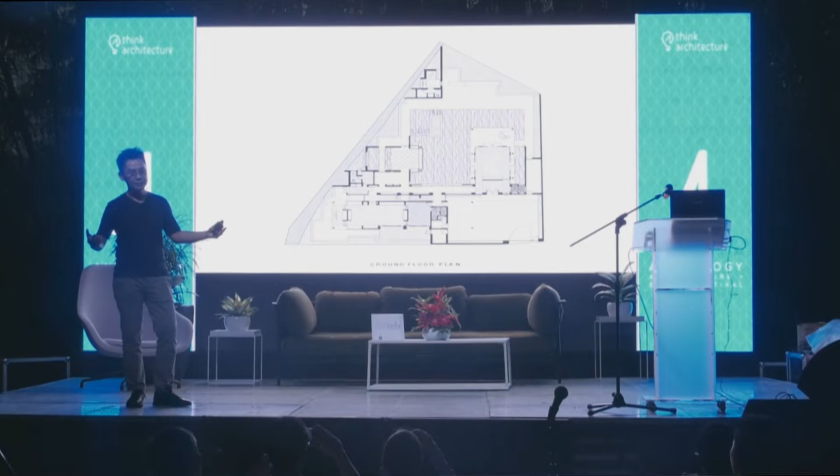Here you can see very truncated pavilions. These pavilions are butting walls, and they are framed into a square reflection pool that creates the central space and the ambience and feeling of the house. When you come home, you're greeted with this wonderful pool of water, which helps you calm down and feel like you're back home, back into a resort. That was what the client wanted.

From one house, we made such an impact with the owner that the owner's brother came to us and asked us to do yet another house for them. Here, the family was quite different—they valued their privacy, but at the same time also wanted to enjoy the valuable garden space in Singapore, which is very expensive if you live in landed property.

So they wanted to be able to open up, and we devised a somewhat upside-down house where the top can be turned into something very opaque and very solid. What you see here are some louvers, where when closed, it becomes a very solid box. This is actually the master bedroom and master living area, where they can have privacy and at the same time open up to enjoy the breezes and the views out.

This was where we devised a new, reinterpreted monsoon window, where we could close up the solidness of it as a wall and as a closure, but through a horizontal window, we were able to allow the breezes to come in. So you enjoy the rain and the breezes at the same time. I think this was something we later used in tropical high-rise situations.

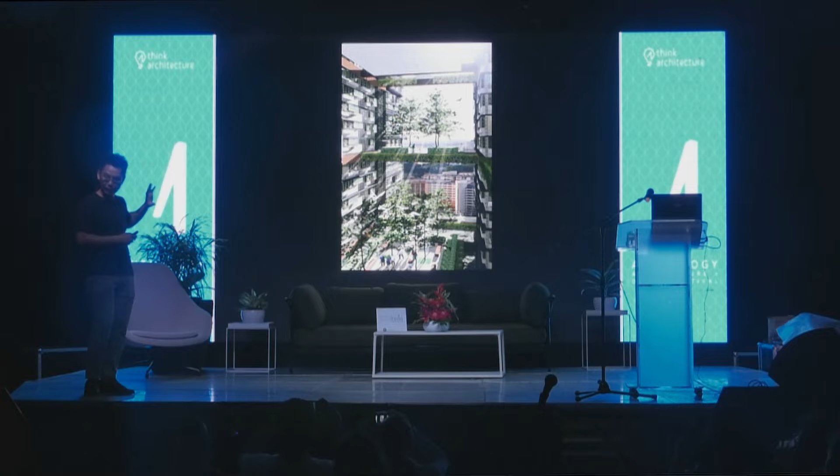So the idea was very simple: use the towers as a structure to support horizontal elements that allow us to choreograph the horizontal movement with this mega structure. At the same time, with these horizontal circulation spaces, we were able to domesticate this mega structure, so at any time you don't feel it's actually 50 stories, you feel it's only 5 to 10 stories. This was the rendering we created, showing how it was divided into 5 stories and then also 10 stories.

So it brings it down to a scale where people are more comfortable, rather than perceiving the mega structure as a 50-story, 2,000-unit building. At any one time, you feel it is actually a much smaller building. That was the main principle we applied to Skyville at Dawson. So we didn't win the competition, but very quickly we were given a commission in Bangkok, and we were able to realize some of these ideas.

So you'll see this rendering, this drone video, which actually shows you the quality of the spaces, and some of them were part of the competition. Instead of a very solid central core and sealed space, which a lot of the buildings were in Bangkok, we actually tore it apart and created 6 towers, a very porous structure, and also at the same time created vertical breezeways within them.

I call them vertical breezeways primarily because of the way the structure and spaces inside work. Because it has an internal space all the way up to 66 stories, there is a temperature difference between the top and the bottom, and that can actually create very good cross ventilation across all the apartments. That's actually 1.5 to 2 meters air movement speed across this vertical circulation.

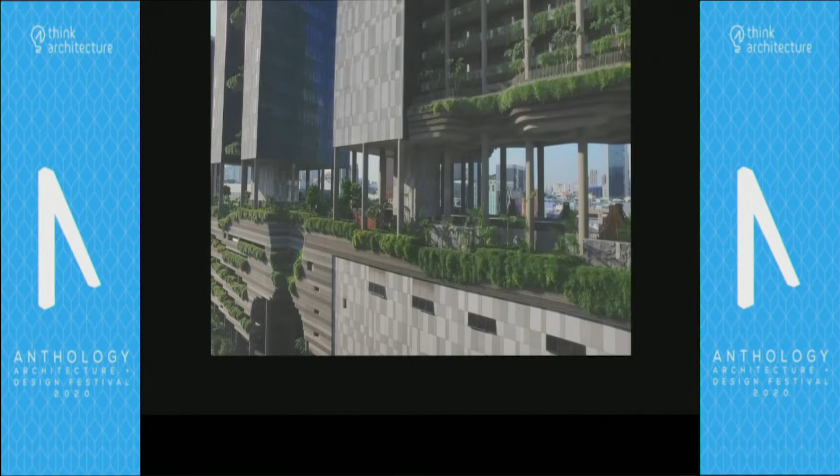So you can see the fifth floor is very porous, and it allows actually, it doesn't block ventilation in the city. This is a very friendly building in the sense that it allows air movement in urban context, in a city context.

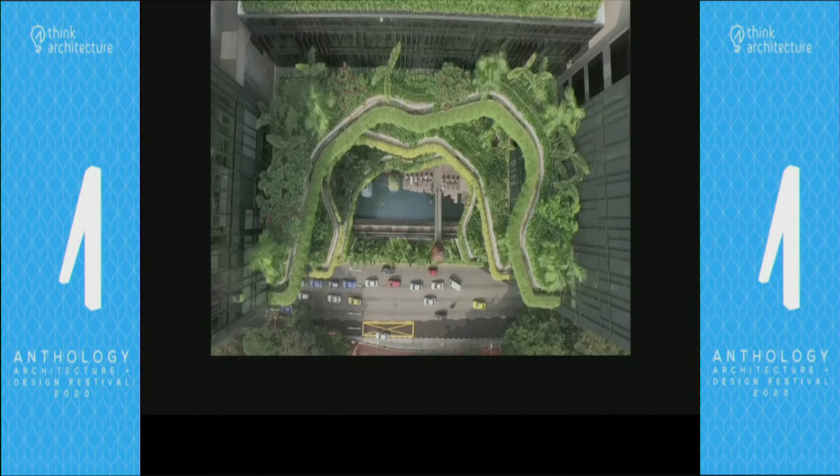Not responding to this. Okay, it's not responding to this. Maybe that's the cause of it.

The other project that I wanted to show you was the public housing project that I mentioned, that after 16 years later, the rules were changed. We were able to actually realize this project. And we were invited by the ministry to envision public housing into the 21st century.

Here I think what you do need to recognize is that we created a lot of community spaces, and you can see we have created 140% of the site area as community spaces. These community spaces are actually very impactful, primarily because they are open to everyone. It is not gated. Anyone, even a tourist, can actually walk in the building and enjoy all the horizontal sky gardens in this place.

So there are altogether almost 1,000 homes in here. It's a bit of a mega structure. But what we have done, which I'll show you in a couple of simple diagrams, is how we actually break down the scale of it, not just to domesticate the mega structure, but also to conjure up the notion of sky villages.

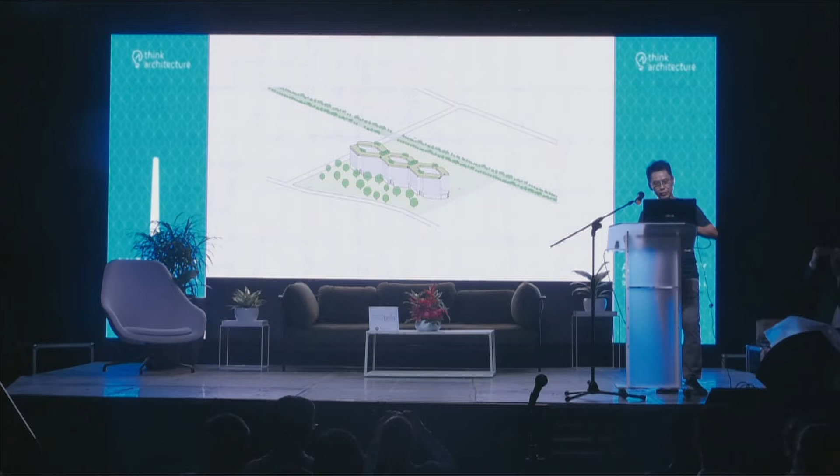And on top of each Sky Village of 10 stories, we actually dedicate an area that is for common use, which we call the Sky Village Green. And on each 10-story stratum, we have 3 Sky Villages, and we actually replicated this 2 times, 3 times, and 4 times. We could go as much as we want, really.

So the density is not an issue if we can actually domesticate the mega structure and still make people feel like they are in a much smaller building. So that is the principle of it. But of course, the structure must be able to support this number of villages in it.

So this is what the inhabitants have got to say about this project.

This residential complex is quite big scale, like a concrete jungle. But at the same time, it's quite small scale in the sense that the units are housed within certain villages, connected by intermediate sky gardens. It makes us want to not just stay within our homes, but really spend time outside to interact and bond with one another.

I think with all this being presented together, it increases the chance for interaction and engaging the neighbors and people around you. That's something that's lacking in many parts of Singapore, where you're just purely living in an urban jungle.

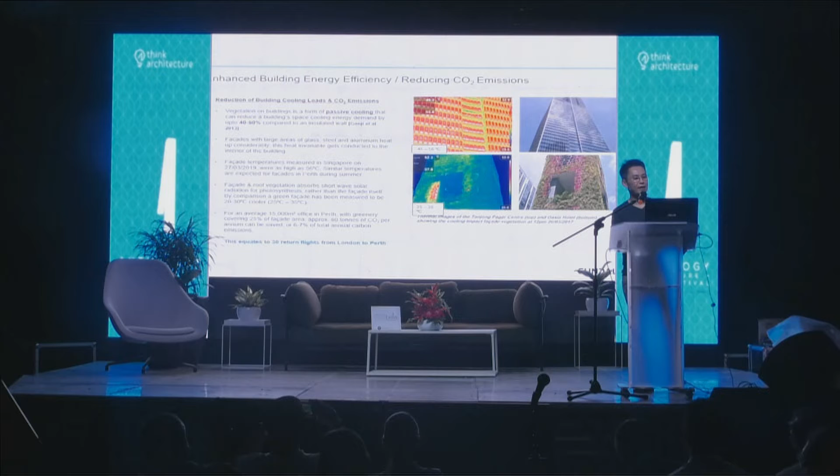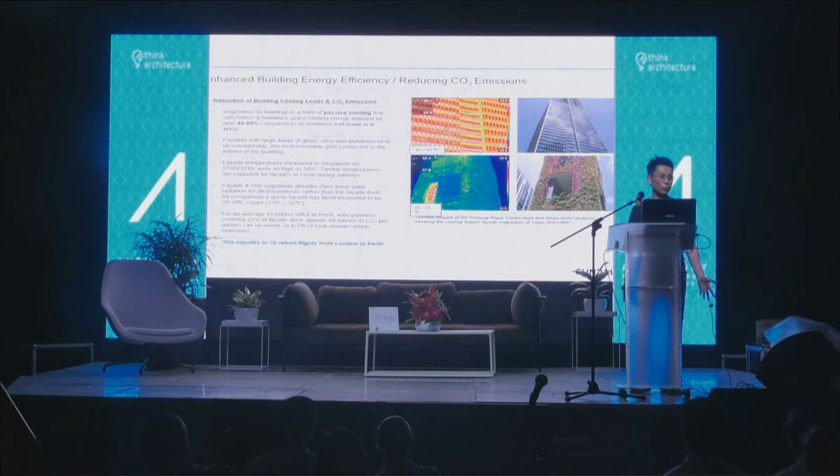Not only that, you can see this thermal imaging of the building compared to a glass and steel curtain wall building. It's almost 25 to 30 degrees lower in surface temperature. This goes a long way in combating the urban heat island effect and improving thermal comfort in the city.

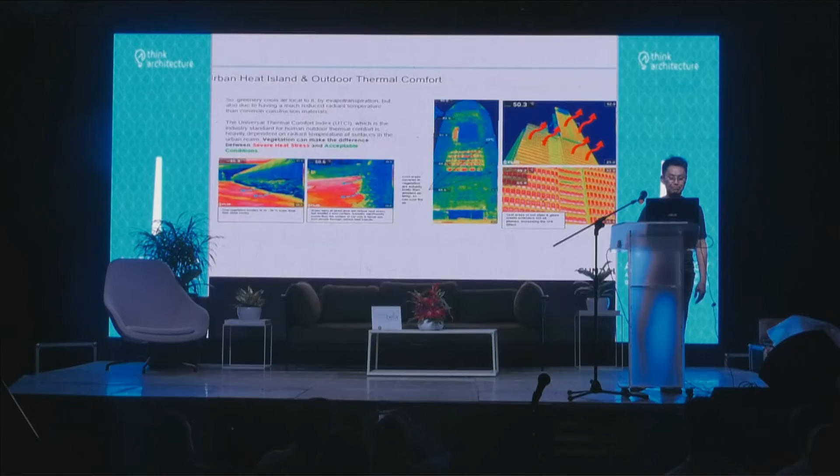So I'll just skip to the next one, which is Kampung Admiralty. This one for us was meaningful primarily because it was a mixed-use development, a social mixed-use development comprising elderly homes. What was really important is that it's located next to the train station, and most societies don't quite want elderly homes right in their backyard. At the time this project was conceived, that was the kind of public sentiment going around, and we wanted to demonstrate that you could have elderly homes in a development and yet have it be an important contribution to the neighborhood and the precinct.

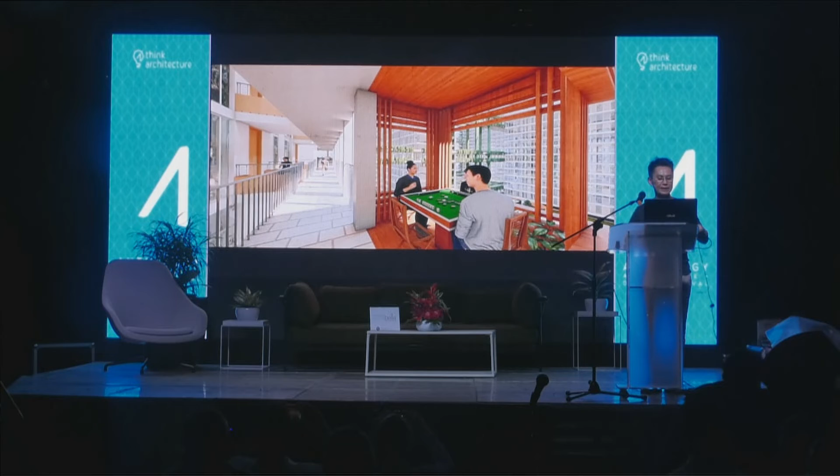So this is in a different climate, a temperate zone. But the idea was actually creating communities, and one of the things we wanted to do was mahjong pods that are part of the social corridors, where not only are the living rooms looking out into the social corridor, you actually see people playing mahjong in all these little pods stuck to the social corridor elevation.

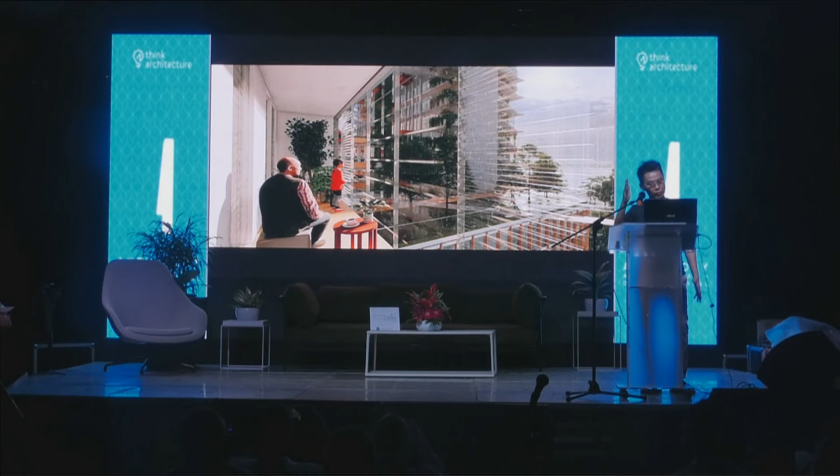We also adopted winter gardens as a device that mediates between the truly outdoor and the indoor, using this device to control the thermal performance of the enclosure.

And also, this is a very interesting thing: you have resettlement housing actually being lived in by elderly people. At the same time, China wants to bring in what they call talents, the younger generation of graduates and overseas graduates back to China, to make them contribute to the city. To do that, they have to create housing to make it affordable for them, to almost roll the red carpet to them, to actually invite them in.

So the fact that this is a younger generation, the millennials, they think differently, they like shared spaces, they like social interaction, so we conceived them at the lower part of the development. You'll see in a short while quite distinct horizontal datum where they connect to commercial spaces, recreational and cultural spaces. This development is actually built around an old factory.

That's why you actually see this funnel. And we actually kept that part to have a connection back to the past.

But it became a matrix of south-facing residential blocks connected by multiple sky streets and also sky parks. And the ground, the semi-basement, which is actually the first level of basement, is actually open to the sky. It's where the community will come together.

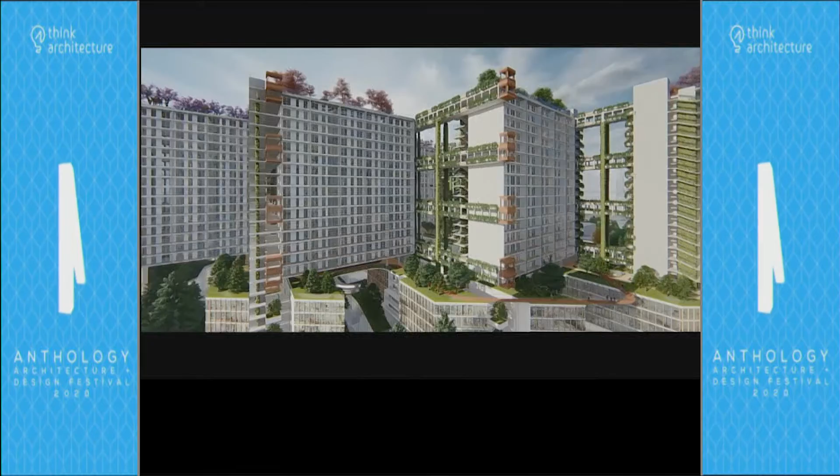So you can see the lower levels, which is almost 4 to 5 stories. It's like your urban scale of sort of low-rise buildings. And above is a matrix of almost more than 2,500 units of resettlement housing.

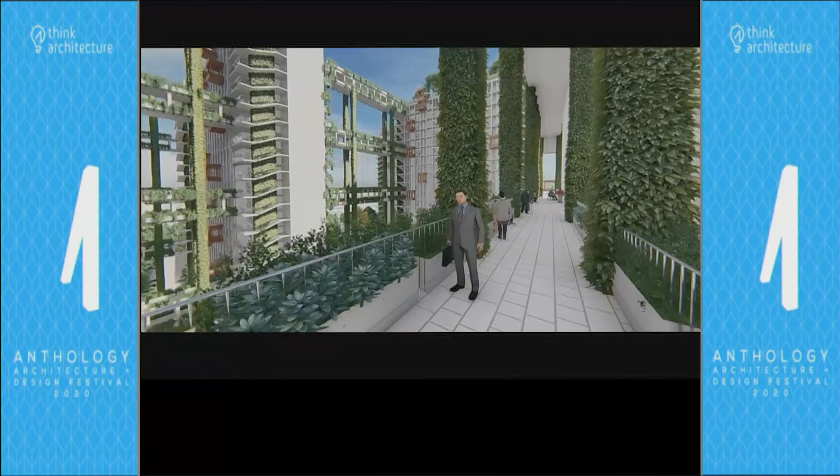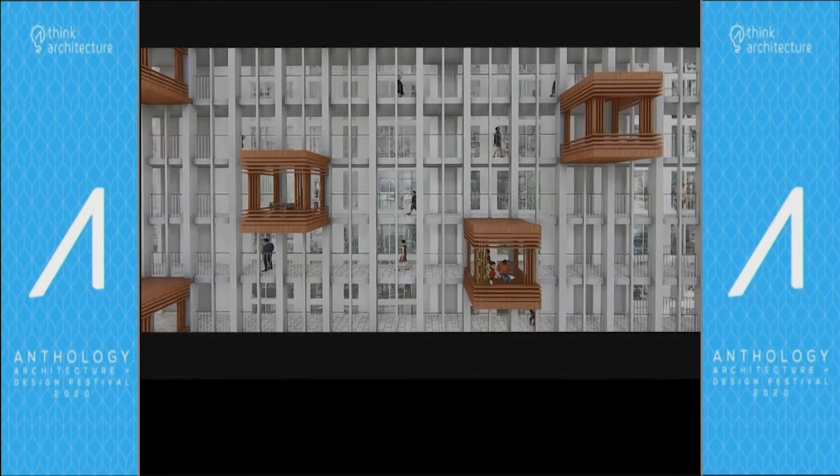So these are the interconnected nature of the sky streets, and what is actually quite good too is it facilitates very good movement within the buildings. I can go visit my neighbor without having to go to the ground and take a lift, but I can just walk across, climb 1 or 2 flights of steps to see my neighbor.

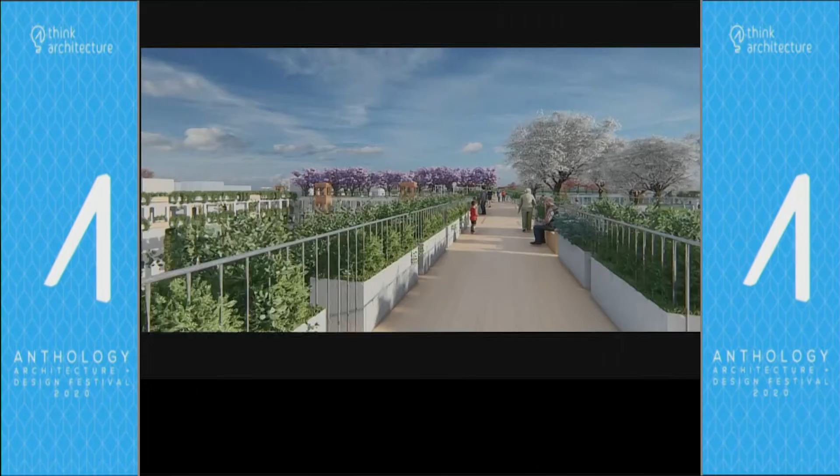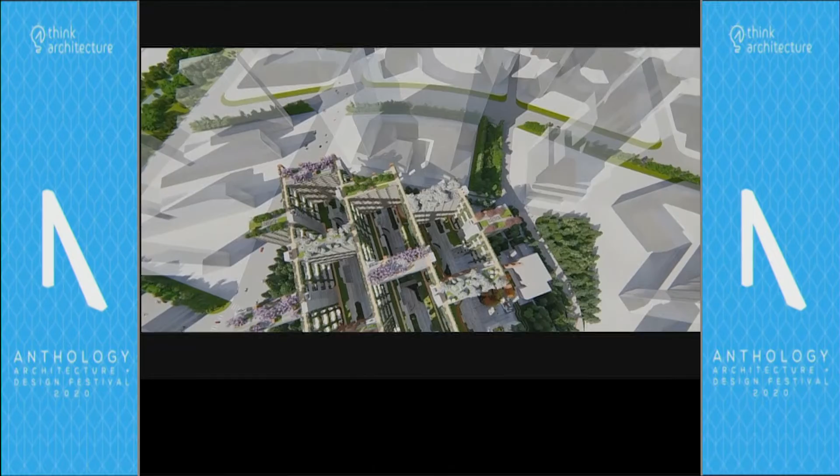So this is actually the rooftop park that anyone can use. This was a mid-level park that only the residents can use. And as a plan, you can see south-facing a matrix of public housing, social mixed-use components within this resettlement development.

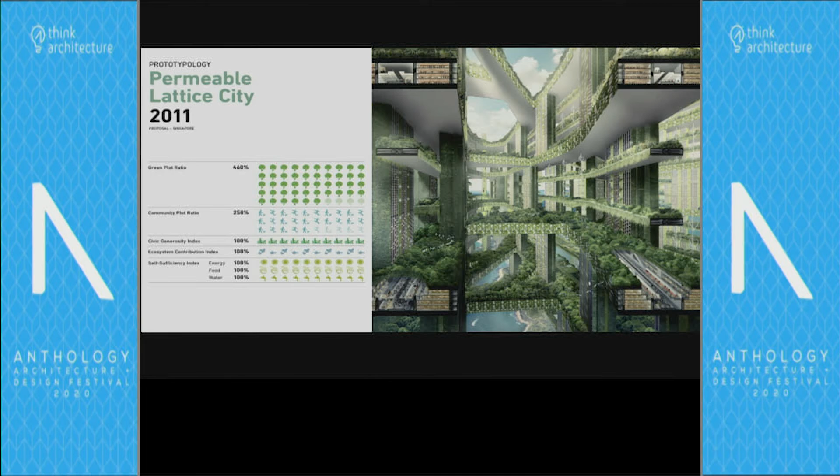This is a second to last project, very quickly. We wanted to, as an assignment that I had for the university, National University of Singapore, see how we can push density to the fullest in the tropics and at the same time create a very livable environment. The task was to actually create 100,000 people per square kilometer, and this is 4 times that of Manhattan.

But we chose to use one of our buildings, the Met in Bangkok, as a prototype to test this typology of density, and we needed 134 of this Met building to create the density that we require. And if we were to scale it up into a city, what do we get?

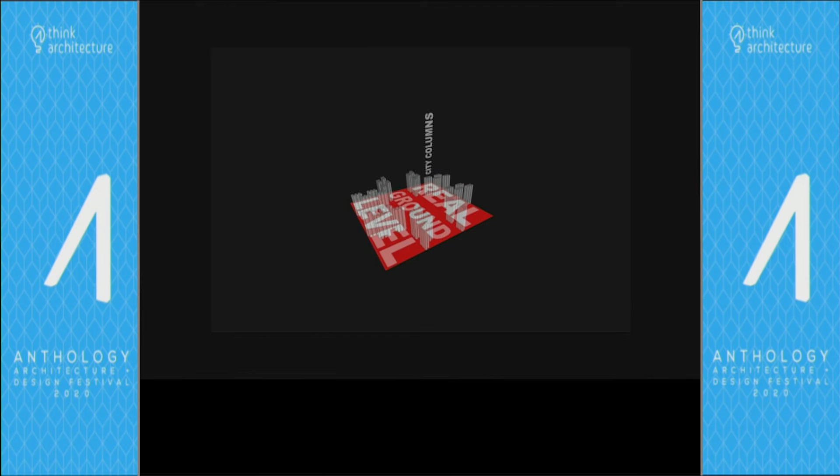So we thought of it as a city grid of 1 square kilometer with interconnected horizontal datums. And this is the ground level, using the buildings, the Met, as city columns, supporting horizontal city conduits that would facilitate horizontal movement of trains and personal mobility devices. But we needed to stack it only 3 times, and no taller than Burj Khalifa.

Singapore has a population of now 6 million people, but what we wanted to do was to house an alternative Singapore in the southern part of Singapore through the southern islands, and also to touch lightly onto the sea in the southern part of Singapore. And as a matrix, this is what you get as a permeable lattice city.